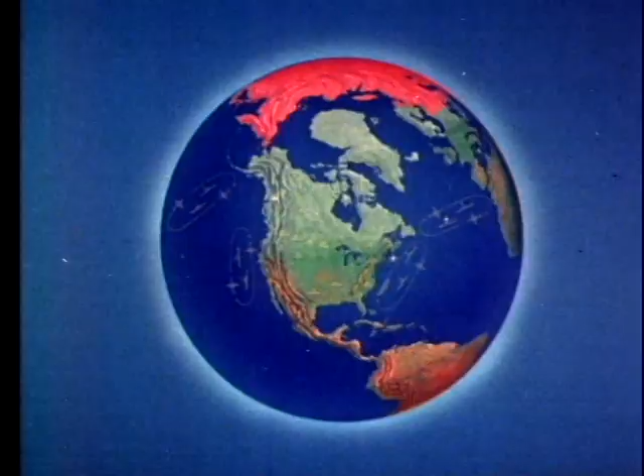Sprawled across North America, from the polar ice cap to the Mexican border, is a giant with 1,000 eyes. Day and night, fair weather or foul, he guards his homeland. This giant is the air defense system of North America, a vast and intricate maze of radar networks. And through the electronic eyes of this giant, we are able to see the enemy before the enemy sees us.

These radars never sleep. Round the clock, they stand ready to do their part in minimizing the penetration of enemy bombers. And round the clock, their quietly pulsing hearts, the magnetrons and the klystrons, help generate the power for peace that keeps America strong.

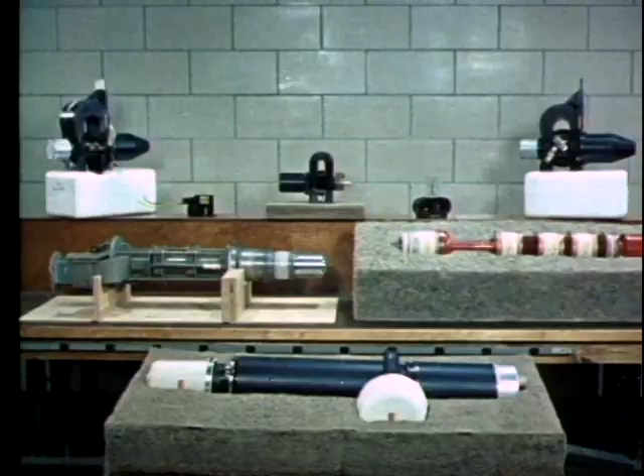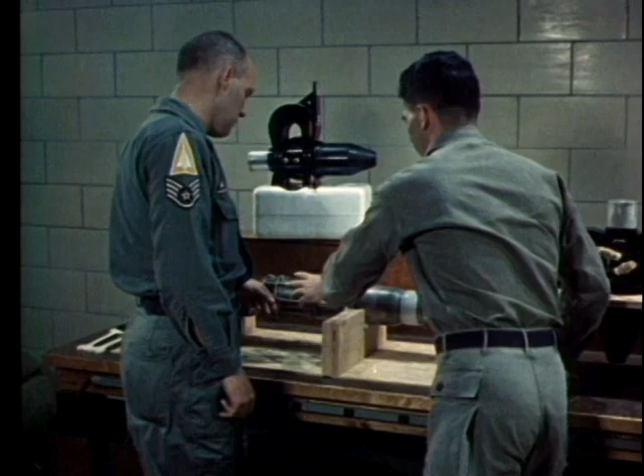These microwave power tubes, the magnetron to generate the radar signal, the klystron amplifier for radio communication, and radar are the subject of our story. It is a story about these vital tubes, but even more about you, the men who work with them. When you have a well-trained maintenance man with a well-adjusted radar at a well-chosen site, then you've really got a winning team.

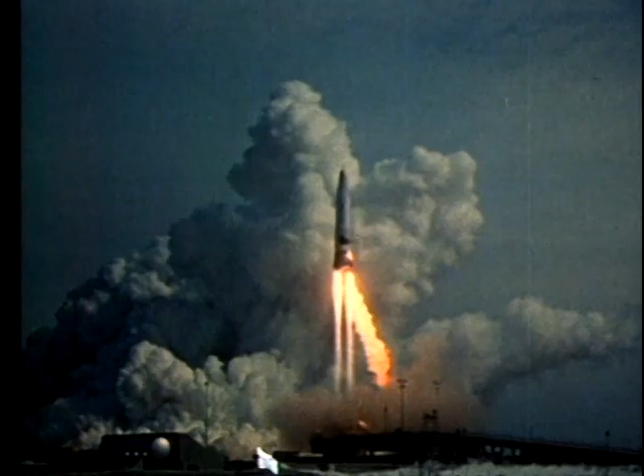They keep the airborne radars operating and ready for crucial missions. In missiles that depend upon radar for guidance. In bombers that depend upon radar for bombing and navigation. In interceptors that depend upon radar for fire control. And in reconnaissance and search aircraft that depend upon radar to extend their vision.

Years of scientific research and millions of dollars worth of equipment have gone into this aircraft. But only if the maintenance men keep the radar functioning can it complete its mission. When something goes wrong, they've got to make a quick decision, whether to attempt repairs in flight or abort the mission.

There's trouble here, that's for sure. But what kind of trouble? First, they check the radar scope presentation. Sometimes this gives a clue. But the most reliable analysis comes from the test equipment on the monitor panel.

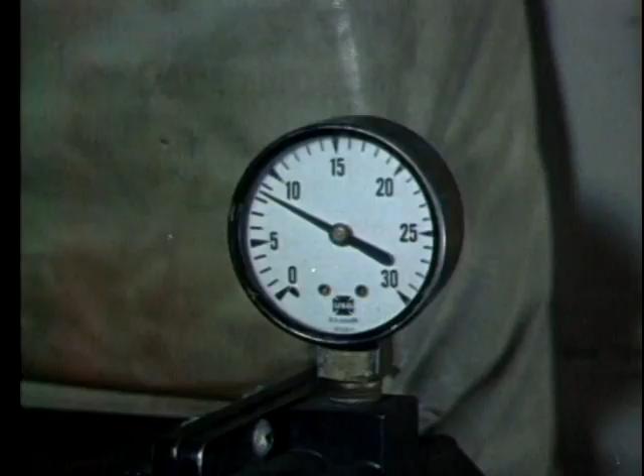Another trouble spot could be the pressurized antenna system. Loss of waveguide pressure will also cause arcing. Yes, the pressure's low. This is a danger signal. If this arcing continues, the magnetron output window may be damaged, the tube's vacuum lost, and the magnetron destroyed.

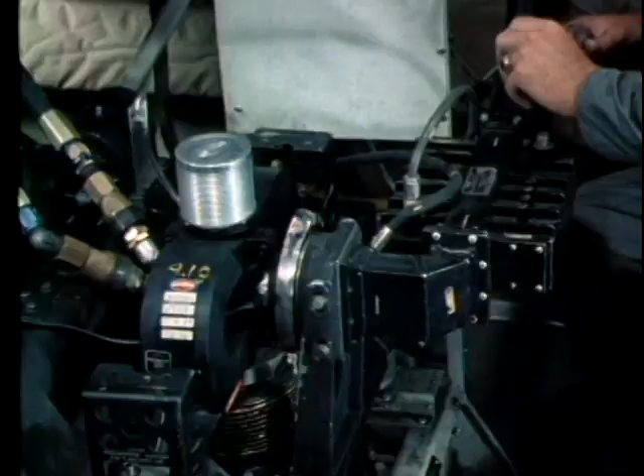Waveguide joints should be tested to make sure they're airtight. This man is making a liquid soap test. See where the bubbles are forming? He's found the trouble. But how serious is it?

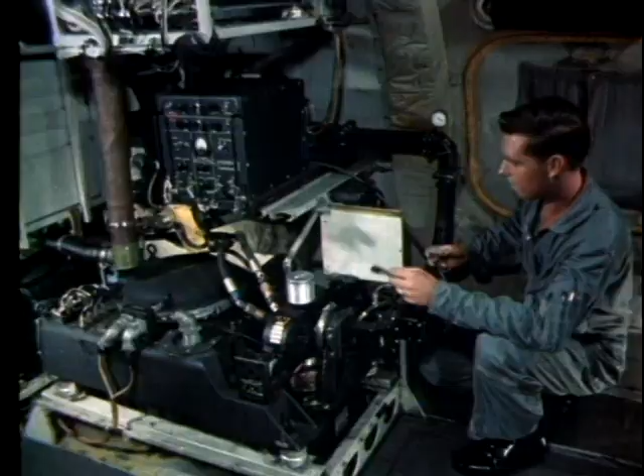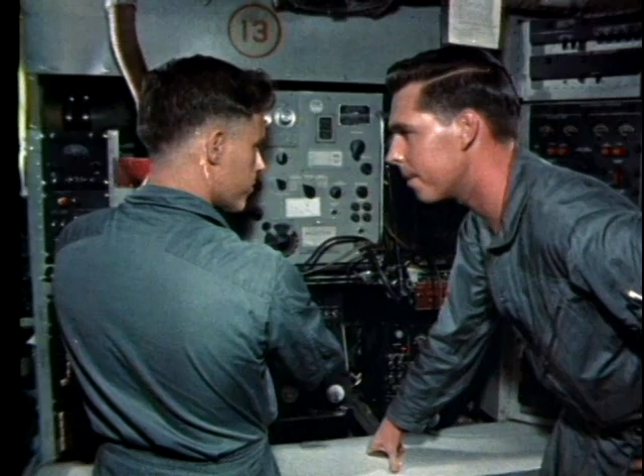He checks the spectrum analyzer again. It looks bad. See how the pulse has changed? Finally, the main pulse deteriorates completely. Bad news. The magnetron is seriously damaged. It's beyond repair. This means shut down the equipment and get ready to install the spare.

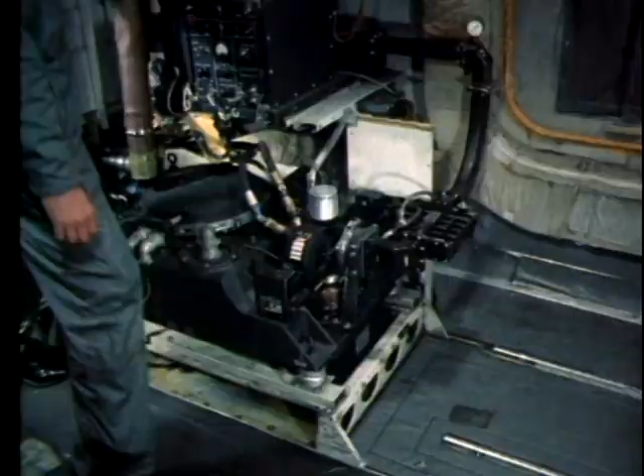While they're working, let's take a look inside the magnetron. Animation shows what caused the malfunction. We'll turn time back a few hours and show the Maggie functioning normally.

As the pulse from the modulator is applied, the Maggie produces radio frequency oscillations to form the radar pulse. This energy is then coupled into the waveguide and directed to the antenna for transmission.

Energy is reflected back along the waveguide toward the magnetron. Normally, when the antenna system is in good shape, the reflected wave won't be strong enough to cause arcing at critical points.

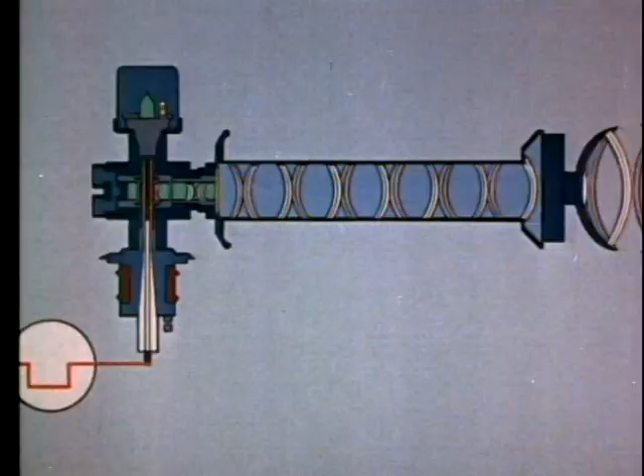But as conditions such as loss of waveguide pressure develop, the antenna characteristics change and the reflected wave becomes greater. Then arcing may take place at the point where the radar wave leaves the magnetron, causing the magnetron output window to crack or puncture.

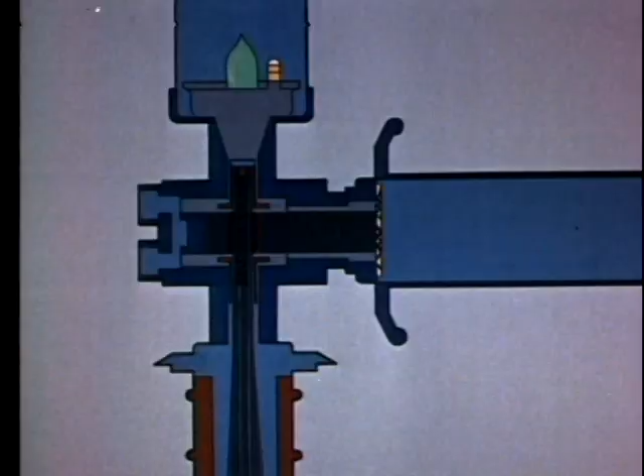As the vacuum is lost, the heater oxidizes and burns out. The cathode cools. Air seeps into the interaction space, and arcing occurs with each pulse.

After the magnetron has been unbolted, the filament and cathode connections are uncoupled. A large magnetron like this one requires 2 men to handle it safely.

Before a Maggie is replaced, all connections, mating flanges, and sealing surfaces should be inspected. Insulating oil should be examined for foreign matter. Damaged or worn gaskets should be replaced.

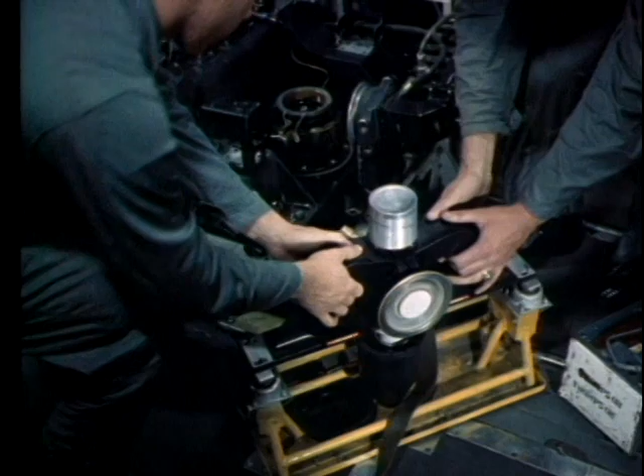Heater's supply voltage should be established at the value marked on the tube. Later, when the plane returns to base, the heater voltage should be double-checked with an accurate instrument.

Now that the spare magnetron has been installed, further tests are necessary. The technician must make sure he has the required pressure and that there are no air leaks. Instructions concerning the care of pressurized antenna systems will be found in the appropriate tech order handbook.

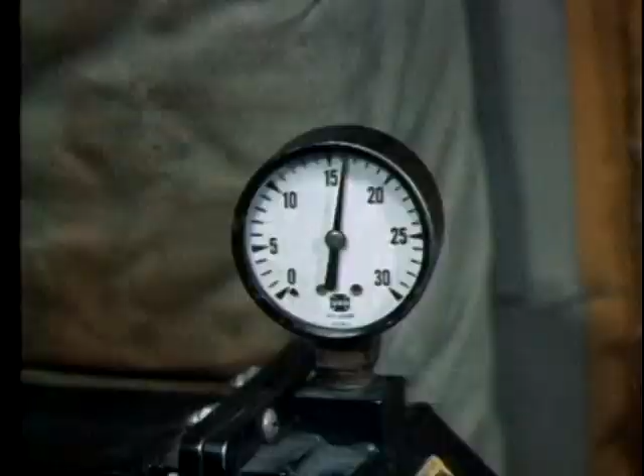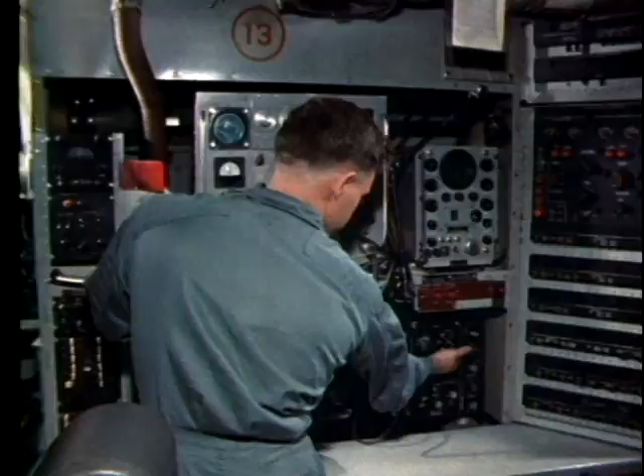The liquid soap method is a simple way to check for pressure leaks and may be used where more accurate means of testing are not available. Test equipment is used to analyze the performance of a newly installed tube.

The output pulse is checked on the spectrum analyzer. See how the large hump or main bang is symmetrical and sharply defined. The side lobes are relatively small. A presentation like this means that the Maggie is firing properly.

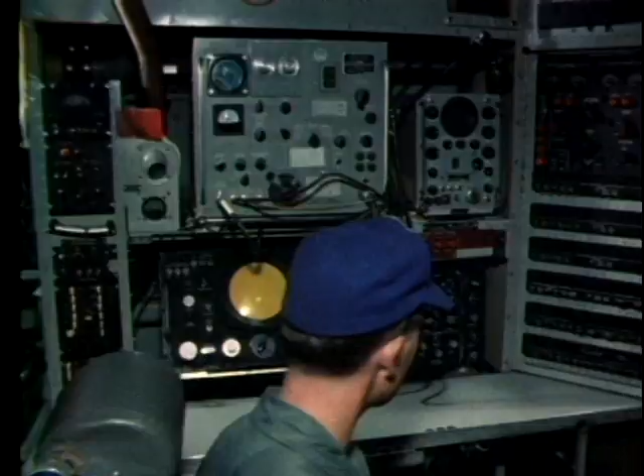Not only that, it means that these technicians know their jobs. They were able to analyze the trouble correctly and replace the magnetron in flight. Because they knew what to do, this aircraft was able to complete its mission.

Let's take a closer look at these microwave power tubes. Magnetrons costing from $100 to $10,000.

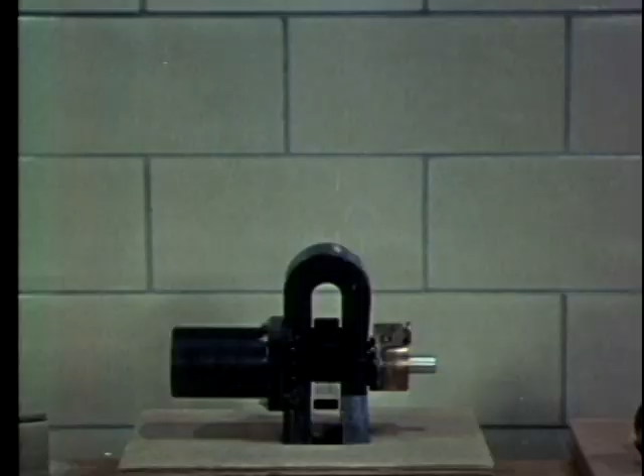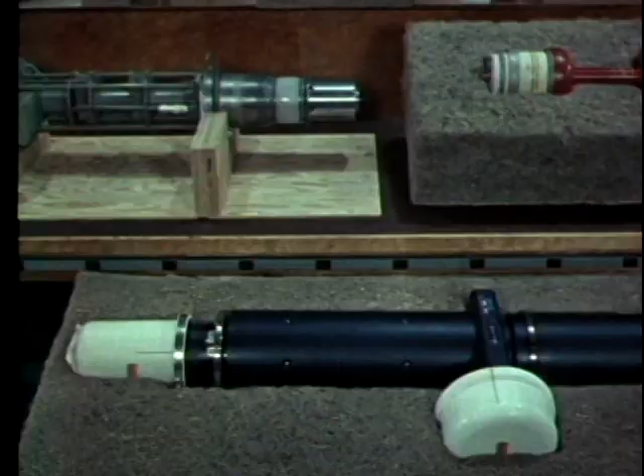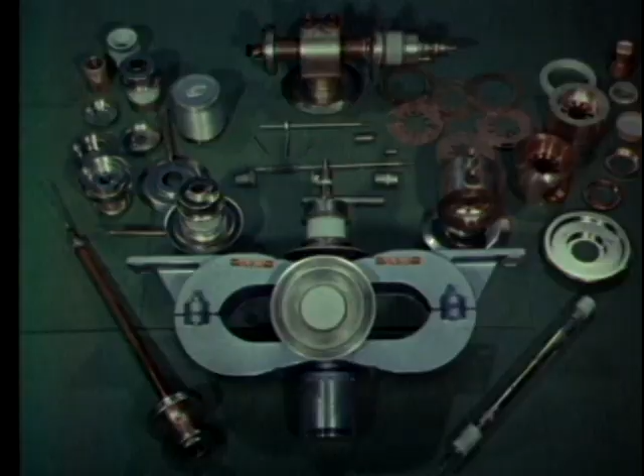Klystrons costing from $1,500 to $25,000. Why so expensive? Let's see what's inside them. Look at this. Parts so critical, they must be inspected through a microscope.

Tolerances accurate to 4/1000ths of an inch. To build them to such close tolerances requires involved manufacturing processes. Specialized parts must be carefully assembled.

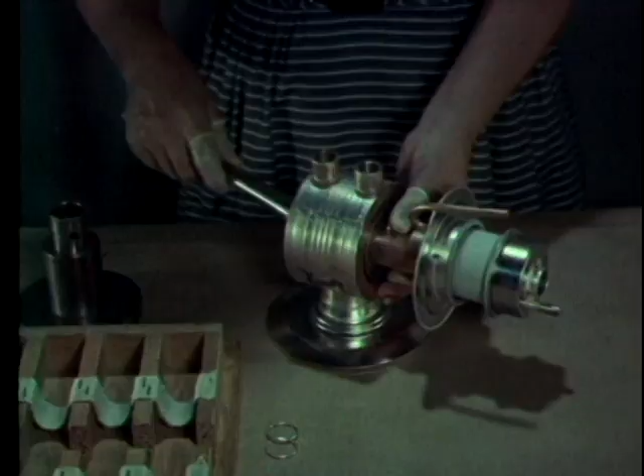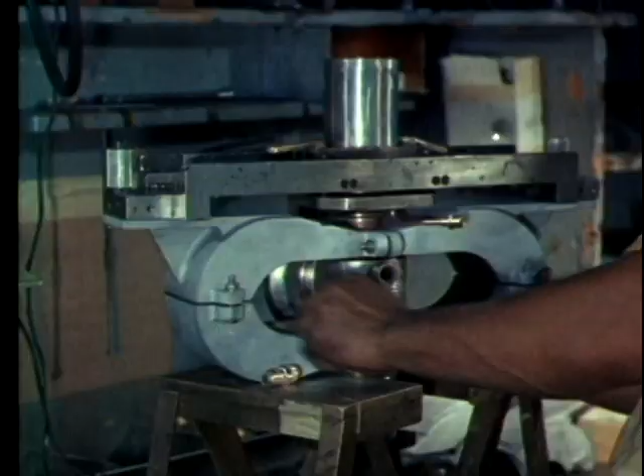The completed assembly is heat treated to bake out gas molecules, so that they may be removed by an evacuation machine. External mechanical parts, such as couplings and magnets, are installed. The final step is rigid testing of electrical performance to make sure it meets the high standards required.

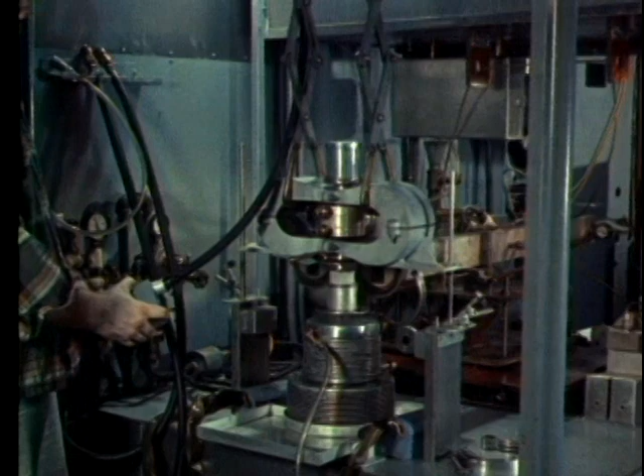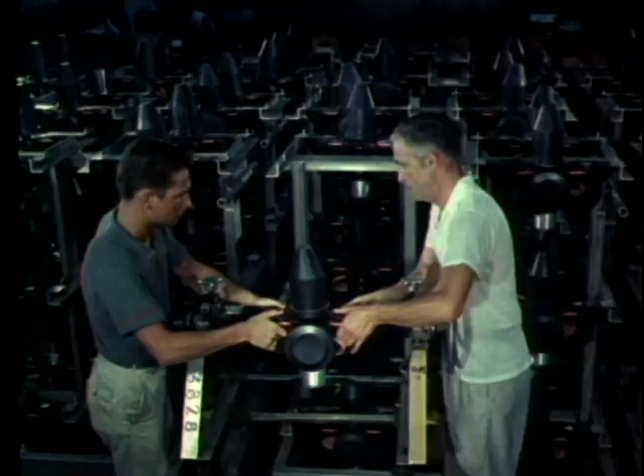Pressure tests ensure leak-proof connections throughout. Now the tubes can be put into storage. Even here, should tiny defects develop while on the shelf, continuous sample testing will reveal them. Before shipment, the delicate tubes are carefully packaged.

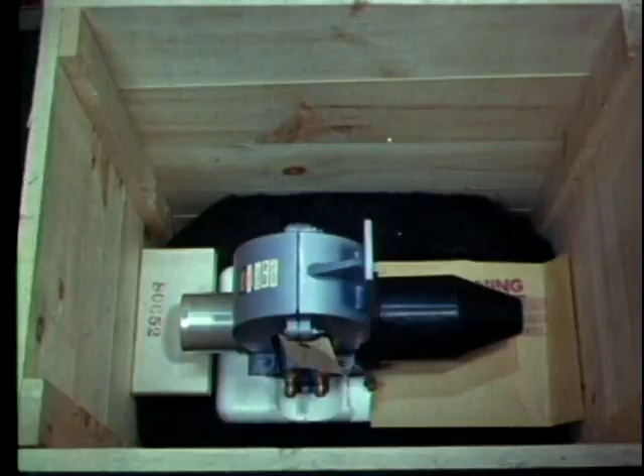The quality designed in during research, built in during manufacture, maintained by rigid testing and careful storage, will reach the user intact.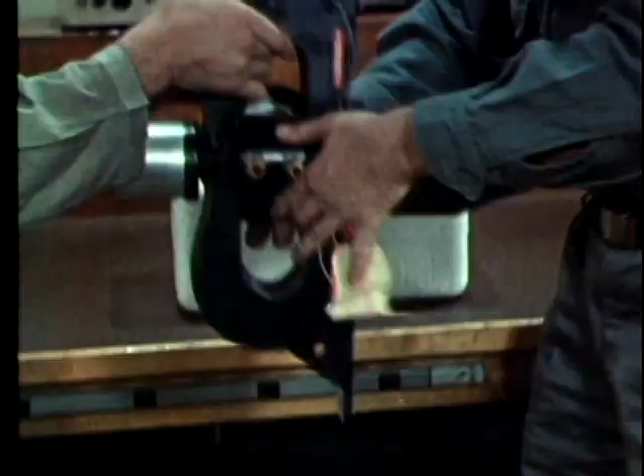Here are a few basic rules on proper handling. Always use 2 men to lift a heavy tube. A portion of a carton makes a good tube stand, protecting delicate parts from damage. But a wooden rack is better and lasts longer.

Save all the cartons and packaging materials. Use them to return defective tubes to the factory.

Magnetrons should be separated at least 12 inches. Then their magnetic fields won't interlock. Don't store them on steel shelves or they may be degaussed.

Don't use steel tools. Use non-magnetic tools. Following these simple rules will save time and trouble, prevent damage, and save the Air Force many thousands of dollars each year.

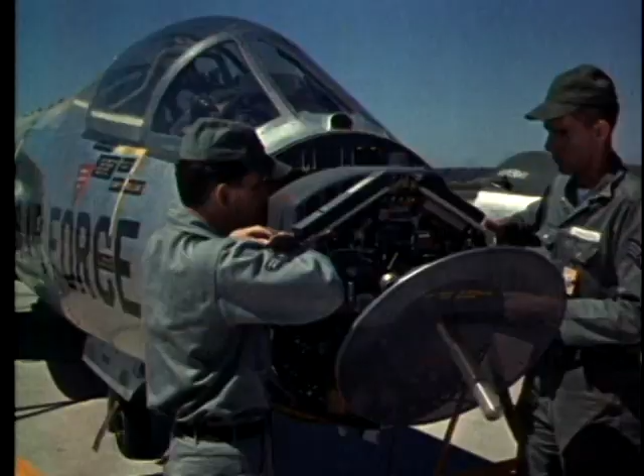On most of the smaller high-performance aircraft like this one, it is not possible to do in-flight radar maintenance. Therefore, most of the work must be done in the electronics maintenance shop. This aircraft has just aborted an intercept training mission. The reason: radar malfunction. Had this mission been the real thing, an enemy bomber could have broken through our defenses.

The maintenance man's job is to find out why the radar malfunctioned and correct the trouble. You'll see that although these radars come in smaller packages than those on larger aircraft, they are just as big a maintenance problem.

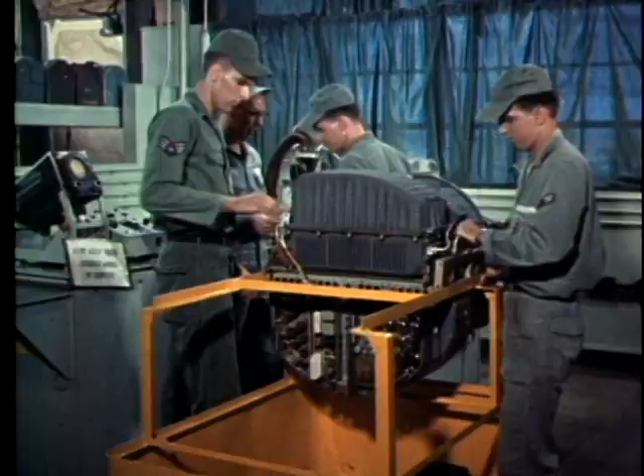The maintenance supervisor is in charge of this work. Before teardown of a defective black box is started, the operational defects should be identified or at least isolated to a particular subchassis. The pilot's report on the radar failure may give a clue.

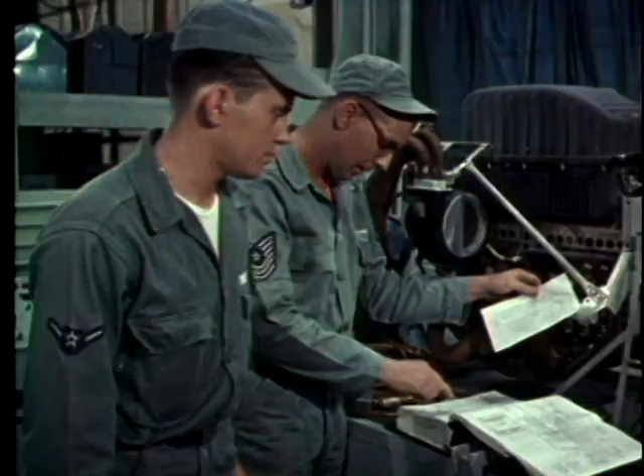Comparing the report of malfunction with equipment handbooks may also help to isolate the defect. But the best aids to repair are the analytical approach of the technician and the special test equipment he uses.

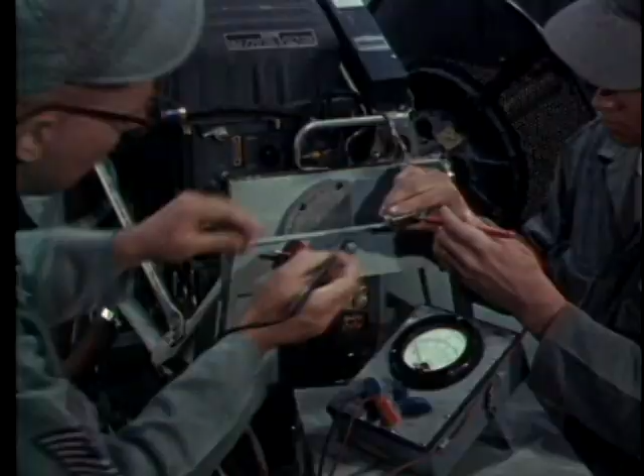An important point to remember is that the transmitter malfunction may be caused by parts other than the magnetron. Wherever possible, other circuit components should be checked before power is applied.

A simple resistance check will often reveal a short circuit. That's what the trouble is here. The airman will carry on from here and trace the short circuit.

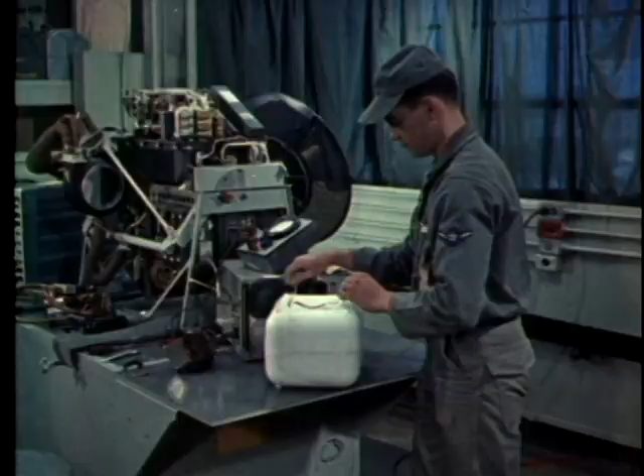So far, so good. He's found a shorted filament transformer and replaced it with a new one. But what's this? He's decided to change the magnetron, too.

The supervisor disagrees. Tube swapping is not a good idea. The old magnetron should be thoroughly tested before any decision is made.

Testing showed that the old magnetron should be replaced. This has been done. Now let's see how the new Maggie behaves. This is confusing. The spectrum analyzer shows arcing.

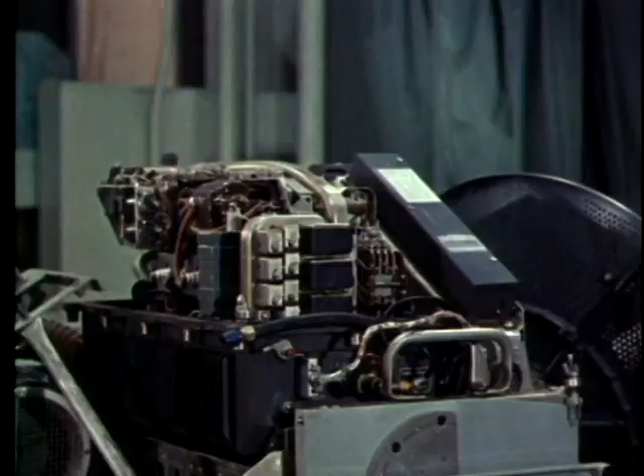Let's look inside the tube and see what's causing it. Magnetrons are made of porous metals, which usually trap a small amount of residual gas.

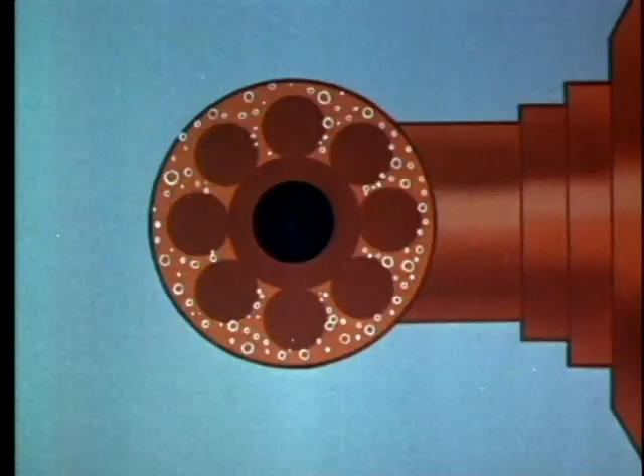During storage, gas molecules migrate into the interaction space surrounding the cathode. When the tube is installed and power applied, it will operate normally if the gas content is low. But if gas content is high, arcing will occur with each modulator pulse.

This arcing might be mild or severe. Frequently, tubes with residual gas can be restored to normal operation by a suitable break-in or seasoning period. During break-in, the gas molecules are driven back into the walls of the tube, and normal operation resumes.

If the equipment is operated frequently, normal operation should continue throughout the life of the tube. Occasional individual arcs may also be noted in a normal tube which does not contain gas, but this behavior is due to transient conditions and should be considered as normal.

All new tubes which display arcing when they are first installed should be thoroughly tested and analyzed before being discarded. This will save the government both time and money.

The repairs are finished. Now comes the break-in procedure. Proper break-in can clear up various degrees of internal arcing. But watch the spectrum analyzer carefully. If frequent arcs occur, switch to standby immediately.

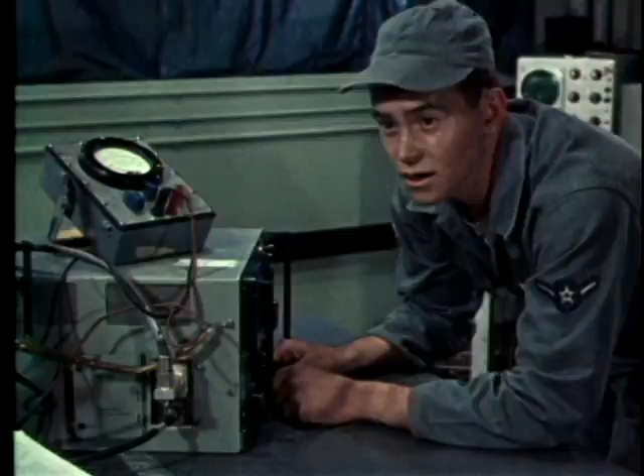Small magnetrons may be damaged if severe arcing is allowed to continue more than 2 seconds. The range selector switch must be changed to short pulse before the magnetron is operated.

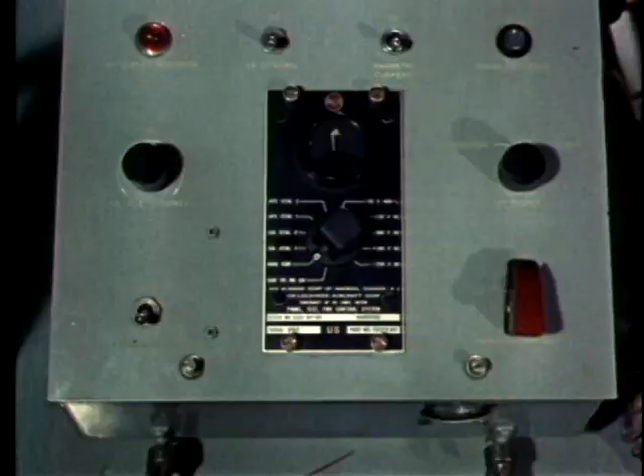If only sporadic arcing occurs, operation may be continued. But a series of arcs may cause the overload to pop. In this case, reset the switch and continue the break-in.

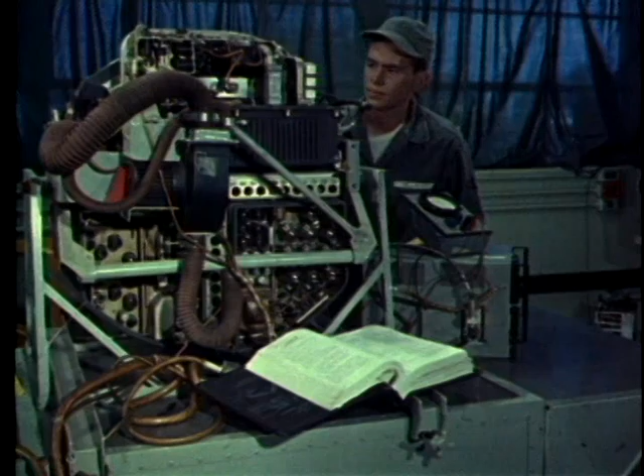To avoid possible damage during the break-in, the technician should keep a close watch on modulator tubes and other components of the RT unit. The time required for break-in will vary with the tube, conditions, and methods used, but normally break-in can be accomplished in 20 to 60 minutes. When break-in is complete and only infrequent arcs or misfirings occur, operation may be regarded as normal, and the equipment made ready for service.

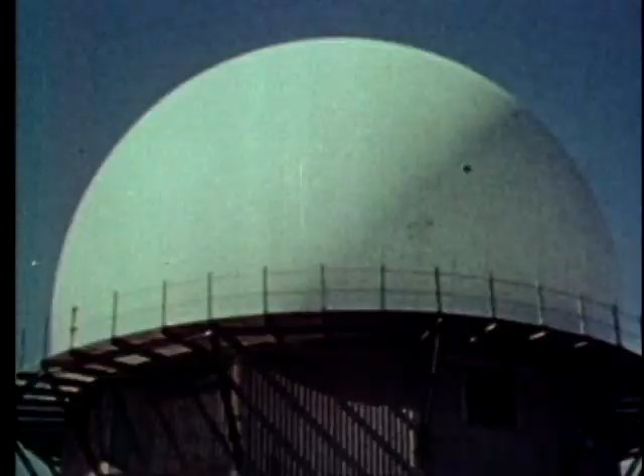In addition to the airborne radars, there are a great many ground radar sites scattered about the continental United States and Canada. They are found in almost every type of American scene: in the dusty expanse of the plains, in the north woods, the heat and humidity of the deep south, in the rolling farmlands of the Midwest, and the saltwater scenes of our coastal areas.

Each of these has its own problems of maintaining and efficiently operating its microwave power tubes on a round-the-clock basis. Some of this equipment is completely automatic, but experienced technicians are always nearby, just in case. At the many radar sites where there is no standby equipment, the maintenance man is an even more vital unit in the organization.

In the operations room, observers keep constant watch on the radar scopes. Here's trouble developing.

When equipment starts to malfunction, quick repair is a must. These men are so used to the sound of the equipment, they can tell by listening whether the magnetron is operating or not. It's not.

Something caused this radar to quit. What was it? Sometimes the meters will tell the story. The filament current has dropped too low, and the filament voltage is too high, indicating that a portion of the heater element is open. A quick, careful analysis has to be made.

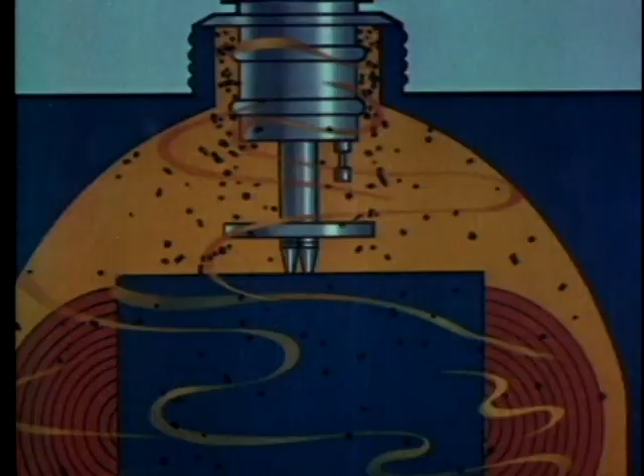Here is how contamination breaks down oil. As contamination accumulates in the oil, current paths are created between high voltage terminals and ground. As the condition becomes worse, due to increase of contamination and change in oil structure, a definite high voltage path for corona discharge is created in the oil.

The corona discharge begins to erode the surfaces of the insulator. As the insulators are penetrated, the vacuum in the tube is destroyed, and the tube is damaged beyond recovery.

The maintenance men have completed oil replacement using all precautions to prevent contamination. They have checked the grade of oil against tech orders and factory instructions.

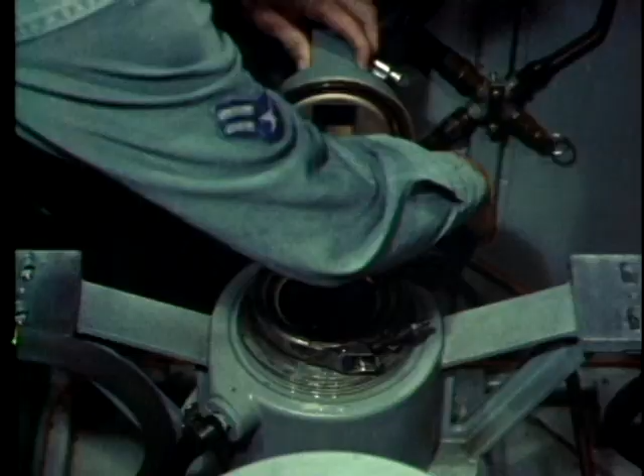But before installing the new Maggie, all mating surfaces and flanges must be inspected and cleaned or replaced as required. It is also necessary to check waveguide parts, replace gaskets, coolant hoses, oil fittings, and so forth.

Be sure all electrical connections are secure. Careful, watch out that terminal doesn't hit the cabinet. That could ruin the tube.

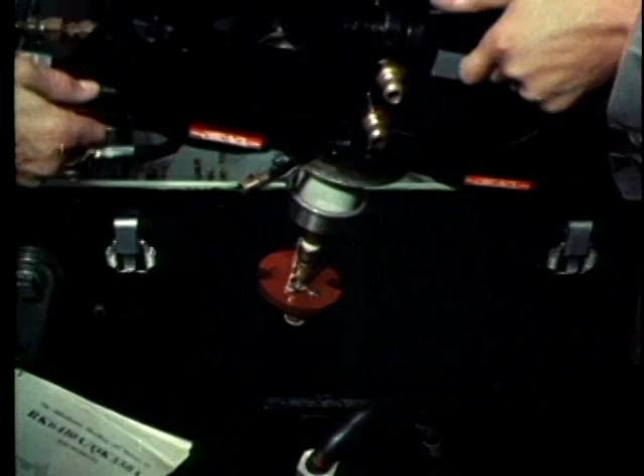Make certain that all clamps, bolts, coolant hoses, and so forth are secure before operating the tube. All set? Okay, hit the power button. Uh-oh, that one didn't last long.

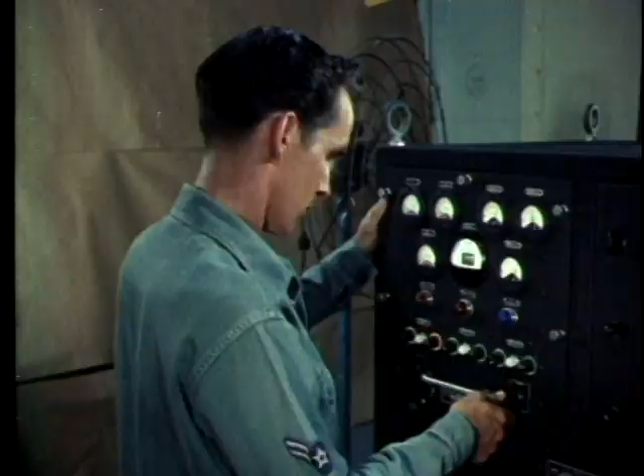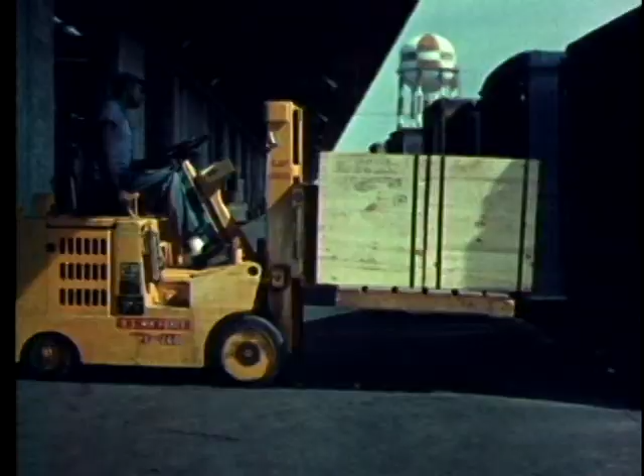There are many reasons why new tubes may fail to function properly. One of the primary causes of tube failure is damage sustained during transportation and handling. This damage may occur during shipping or in the depot, or during Air Force distribution to the base.

Here is what actually happened to that new tube which failed to operate. Nobody saw it happen. Nobody's going to tell. And nobody's going to get the slightest use out of that magnetron.

But these men don't know this Maggie fell off a truck. They just know it won't work. Could it be something wrong with the rest of the equipment? A short circuit? A bad connection? Or should they pull out this Maggie and install another?

They've installed another new Maggie. They've also followed correct procedure, allowing the heater to warm up 5 minutes before applying power to the anode. Ah, it works.

But wouldn't it have saved them a lot of time and trouble and expense to the government if that delivery man hadn't dropped the Maggie off his truck? You see, the maintenance man really is important. If he does his work correctly, so will the radar.

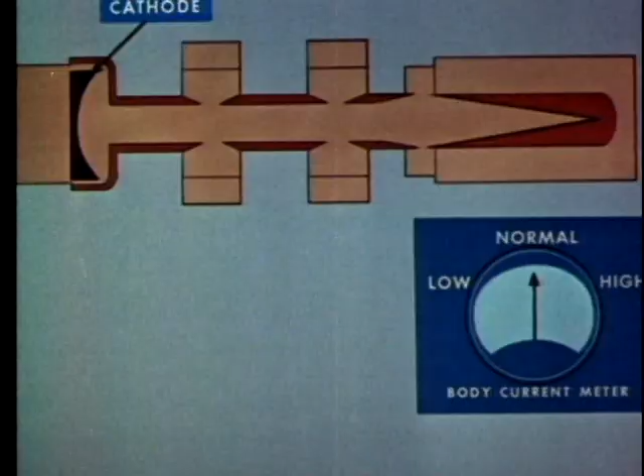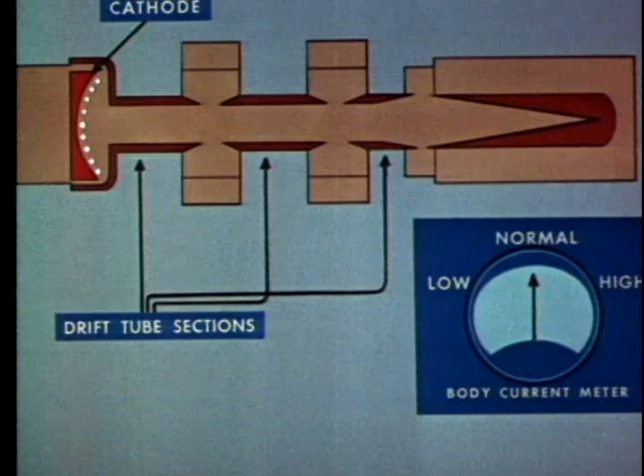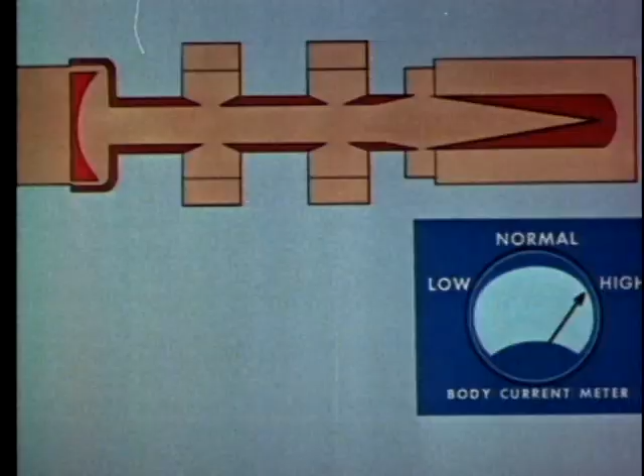Let's look inside a typical two-cavity power klystron and see how it operates. The beam current is emitted by a heated cathode and passes through the drift tube sections. Since electrons in the beam have like charges, they repel each other and tend to diverge, to be absorbed by the walls of the drift tube sections. But electromagnetic coils placed along the tube align them into straight paths. However, misalignment of the focus coils can seriously damage the drift tube tips. Therefore, it is most important to adjust the magnetic coil currents properly during installation of the tube.

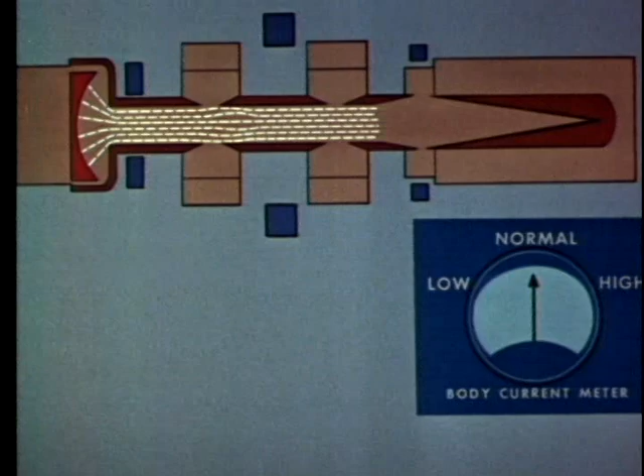When a steady direct current is flowing through the tube, an RF signal from the RF driver stage is introduced into the first cavity resonator. As the cavity is tuned to resonance, a strong RF field appears between the drift tube tips, which form a gap in the resonator. The electrical charges on these tips alternate at the driver frequency rate on opposite sides of the gap. At the same time, individual electrons in the beam are being accelerated or decelerated at the RF frequency rate.

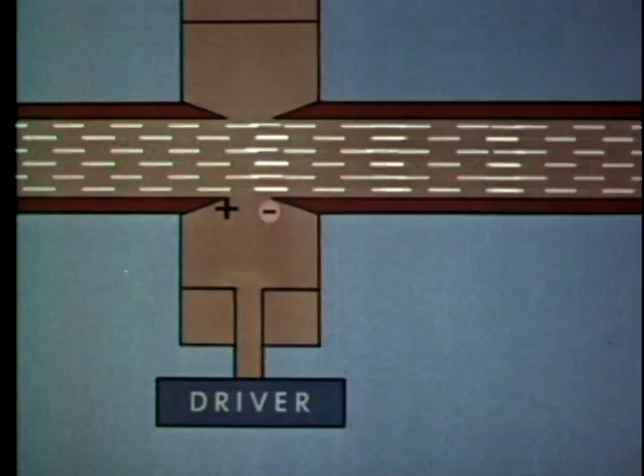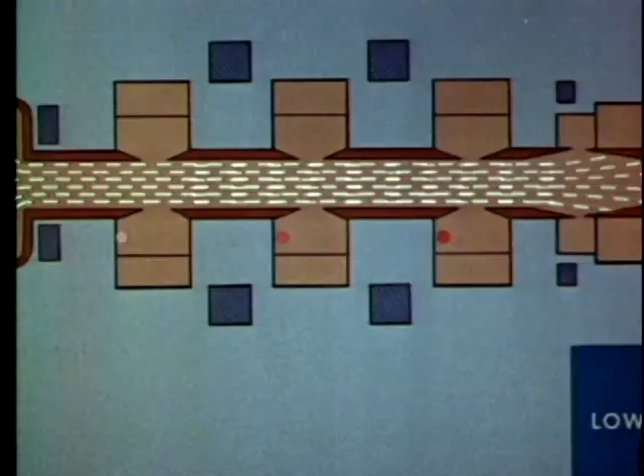This produces bunching of the electrons as they approach the gap in the second resonator. There they are decelerated and release energy. The resonator converts this energy to RF energy and amplifies it. Additional resonators are sometimes provided for greater amplification. From the last resonator, the amplified RF signal is coupled into the waveguide and transmitted to the antenna.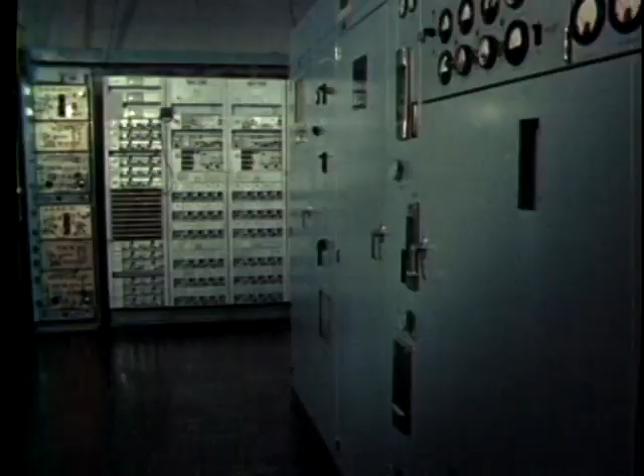This transmitter has dual equipment. One transmitter operates while the other is on standby in case of emergency. The equipment is automatic. Meters and instruments keep a constant check on its operation, and a warning light flashes in case of trouble.

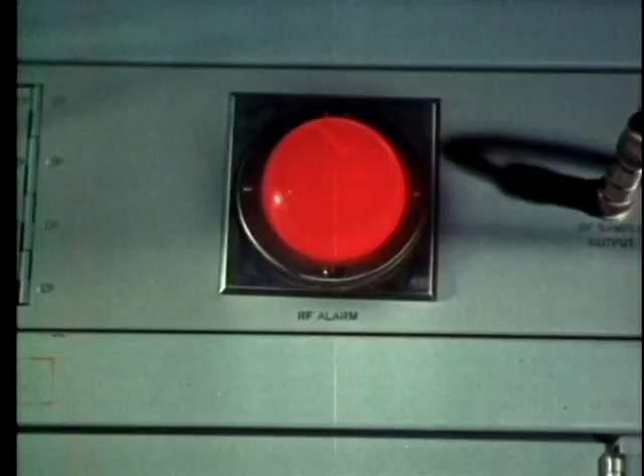And speaking of trouble, a glance at the meters tells them the trouble is in the transmitter output. The equipment is reoperated. Readjustment of the output cavity and coupler may correct the trouble, but the arcing continues. Since adjustment won't correct the trouble, all they can do is shut down the transmitter for repair and switch over to standby.

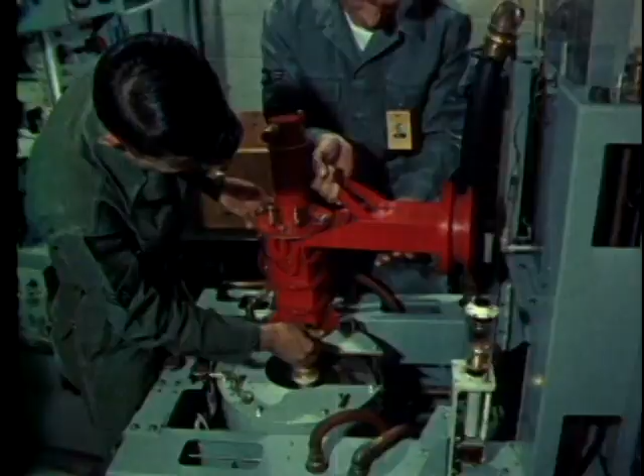The klystron has been removed for inspection. It may have been damaged by the arcing. Yes, the output ceramic is badly damaged.

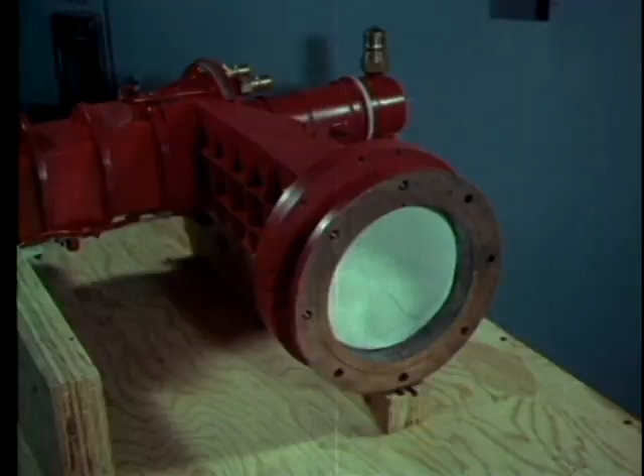An important consideration in maintaining the klystron is the proper adjustment of the impedance matching unit. In this case, improper adjustment of this unit during installation ultimately caused the arcing in the output section which in turn destroyed the tube.

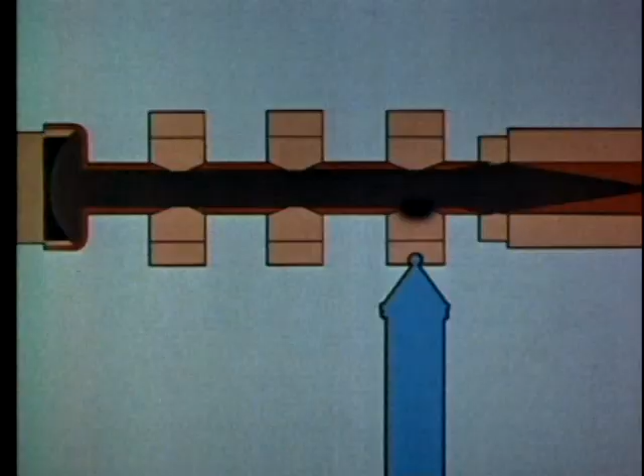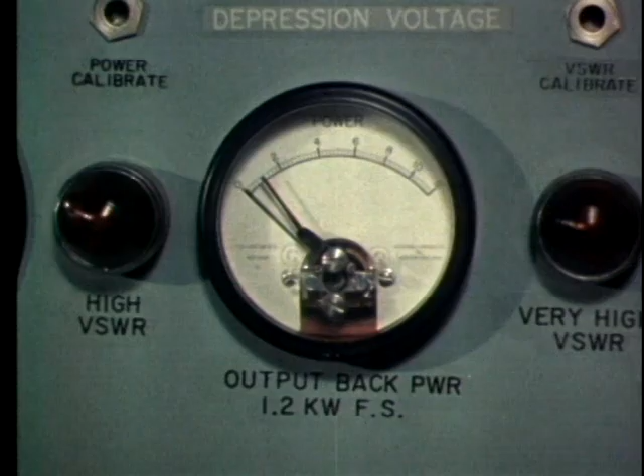There are two types of meters which help maintain proper coupling: the power output meter and the VSWR, or voltage standing wave ratio meter. These measuring devices should periodically be checked for accuracy. But in general, the best way to avoid damaging or destroying the klystron is to study and thoroughly understand the various installation and operating instructions furnished by the equipment and tube manufacturers. Only by doing this can the Air Force technicians and maintenance men hope to get the full operating life from their klystrons.

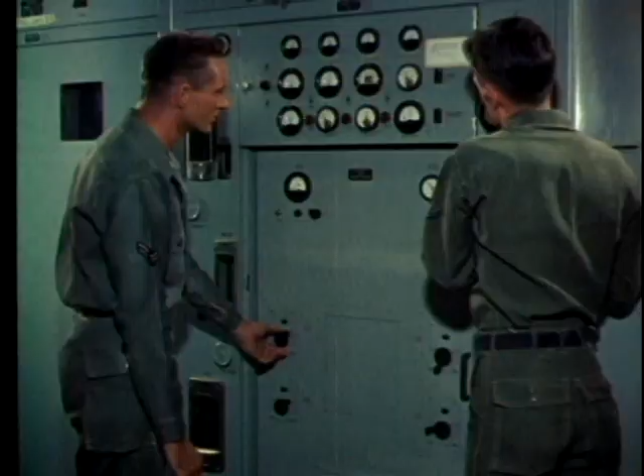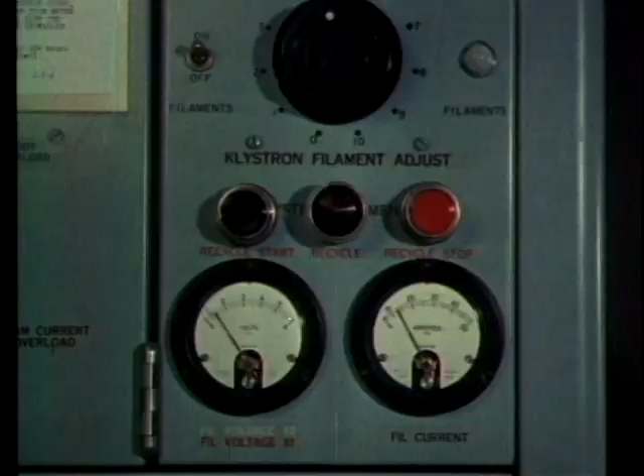At the Tropo Shack, the maintenance men have installed the new klystron. But before operating at full power, they are careful to recheck all circuit meter readings and coolant flow gauges. These meters are important because a minor error in one of the adjustments might shorten the life of the tube.

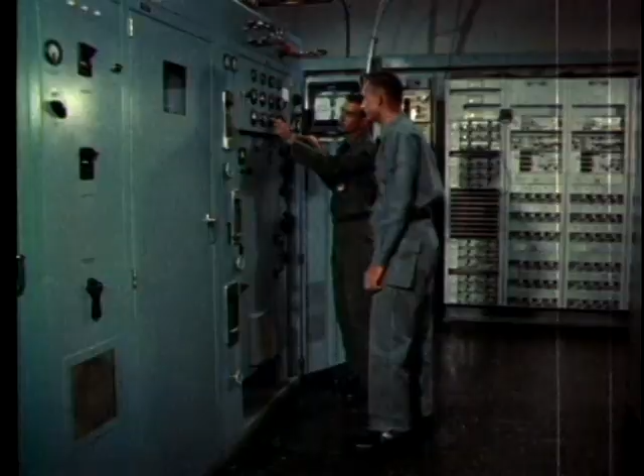The power klystron is really a very dependable piece of equipment if properly treated. Once it has been correctly installed and aligned, it requires very little maintenance during its long service life. A good rule to follow is: install it carefully, align it properly, then leave it alone.

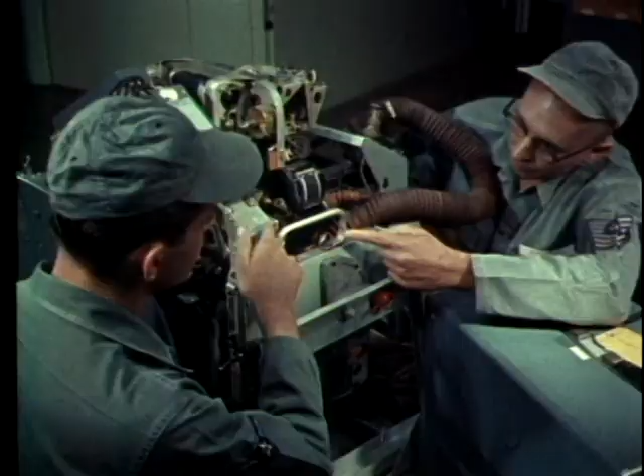As the progress of aircraft and air defense continues, other and more varied uses will undoubtedly be found for microwave power tubes. With these new applications will come new problems to be solved by maintenance men of the future. Those men will tread the paths charted by technicians of today who found that this type of maintenance can be simplified by careful attention to four basic factors: careful handling, proper break-in, avoidance of tube swapping and trial and error maintenance, and the timely use of maintenance aids such as test equipment, tech order handbooks, and manufacturer's information pamphlets.

There is no substitute for know-how, initiative, and ingenuity. Yet no one man or group of men can do this job alone. Maintenance is a team effort. Only by the cooperation of procurement, supply, transportation, and every department concerned can the Air Force continue to operate the reliable radar equipment which is such a vital part of national defense.

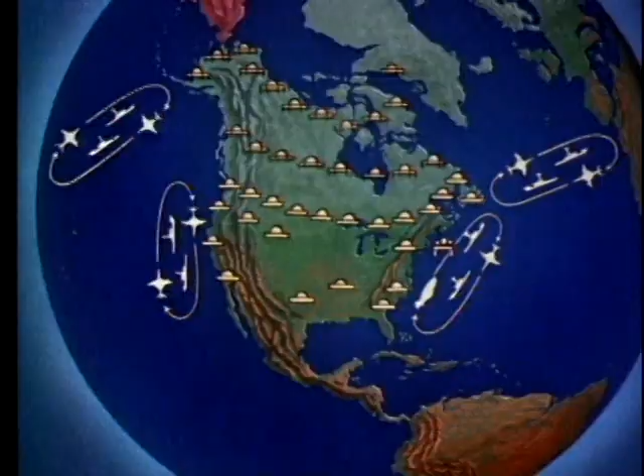Only by continued teamwork and devotion to duty can the radar eyes of America guide us to that peaceful tomorrow, which is the reward of nations who stay alert today and every day.